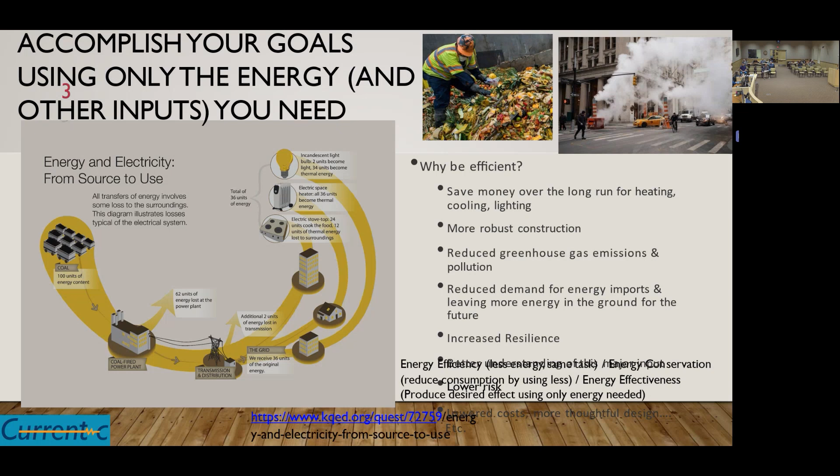For instance, if you reduce the volume of the inside of your house, if you've got an attic in your house and the attic sucks the heat out of your house and your insulation is up at the roof, then you're basically heating the attic. So if you want your heating or cooling system to work more effectively, insulate the ceiling. Put the insulation at the ceiling, let your attic go cold. And then there are other techniques of retrofitting, and some of those will fit a little bit nicer with commercial type buildings, and that would be insulating existing walls and such.

But there are so many new technologies out there, and I'll touch on some of those later as we get further into the presentation. But other things that go hand in hand with getting a permit is making sure that it meets the codes. And if you're not aware of it, as users of the various building codes, we have a library of codes that we have to adhere to. So it's no easy task to keep up to speed with what the codes are doing. But I think pretty much the technology that we have available here in Los Alamos is all approved by the code.

Why don't you go back? We'll let Steve talk to us some more about those principles, Steve, since you had started on those. Well, okay, let's just start at the top.

Utilizing indigenous materials oftentimes can be a cost savings, but if you take the scenario of adobe, when us gringos came to New Mexico, it was easy to get an adobe structure built because it was readily available and labor was cheap. And then when the energy crisis hit us in the 70s, people started looking at the thermal values of building materials. And as soon as that happened and people figured out, a 12-inch adobe wall and a 6-inch frame wall, which is cheaper? And of course, the adobe people left money on the table, so they raised their prices.

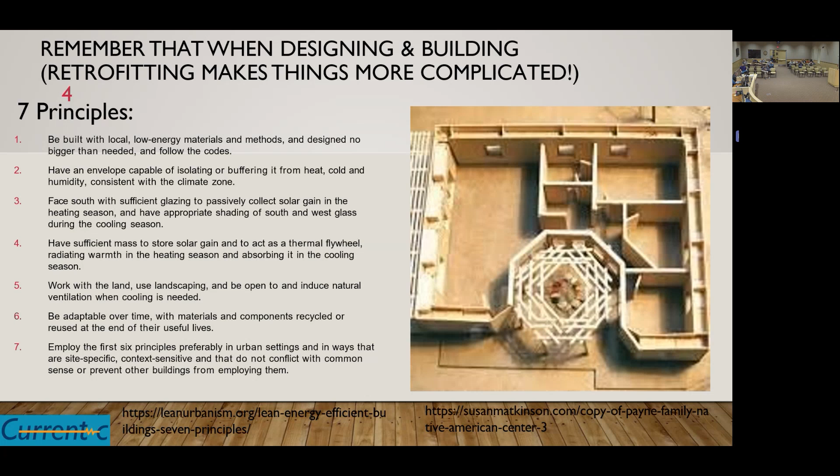So where does energy come from anyway? It's harnessing the power of nature, whether that is electricity or water or the coal that we pull out of the ground, or the oil. My sister, who's a geologist, says she doesn't know why I focus on energy efficiency, because after all, oil and gas and coal are renewable. I'm like, yeah, but not on my time frame.

So, they were put there a very long time ago. And so whatever they are, we try to harness them for our purposes. And sometimes Mother Nature doesn't really like being harnessed. So that's where we get to climate change. It's obviously something that we're all talking about in various ways. Said sister does not believe in it. I'm sure many other families are split in that way.

But the concept is that as the world changes, as different parts of the world heat up, other parts cool down. That changes wind patterns, ocean patterns, rainfall patterns. And that is what's going to change our world for the foreseeable future. And we just haven't been there. We don't know what it's looking like. That also is changing design parameters.

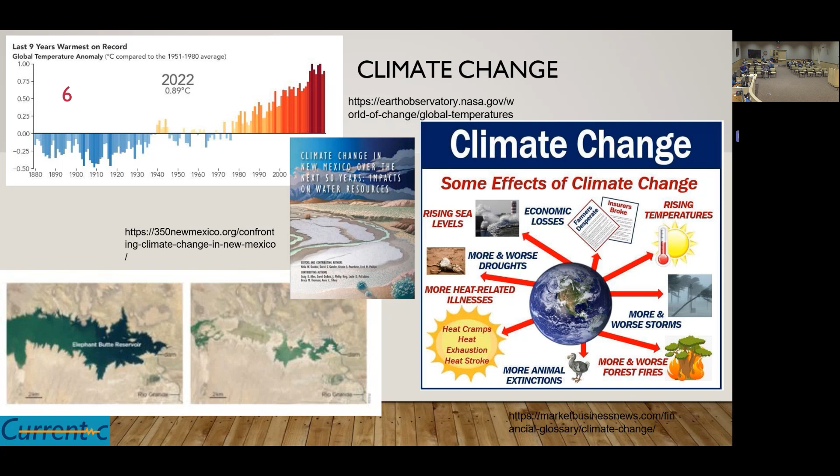And you can see a lot of the climate change effects there. And last time I went past Elephant Butte, I struggled to find it. So I haven't been by for the last couple of months.

Go ahead. So buildings are both part of the problem and part of the solution. About 40% of energy use is used in buildings. And that means that if we work on reducing that 40% in various ways, we can be part of the solution. There are a couple of methodologies where people try to look at how we can solve this problem.

Project Drawdown, which is the left side, they talk about how we can draw down the carbon and other particulates in the atmosphere so that we don't have as much global warming. There are various types of wedges that say, hey, we've got the technologies out there. If we just work on them methodically, we can do that as well. Did you want to talk about?

Yeah. Regarding carbon capture, we have here in little Los Alamos a company called Spiritus Technologies, and they are doing carbon capture, and they're extracting it from the air, and they're condensing it into a solid, and it will be buried in played out oil wells in Wyoming. This little company

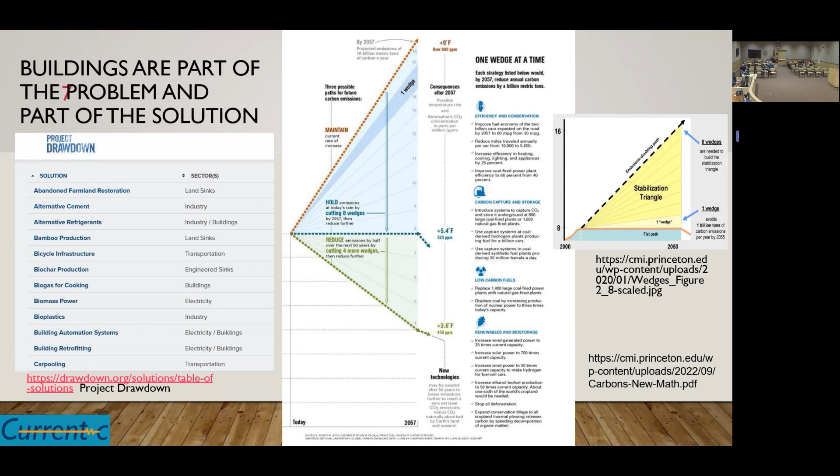Thank you. Yeah, there's a lot of innovation going on in this. As people are realizing the scale of the problem, there's a lot going on. I'm sure there's a lot going on up here. So another word that we talk about a lot is sustainability. And it's not my favorite word because it's overused, but I haven't figured out a better one.

The definition that I have is that it's an ability to maintain or support a process continuously over time, whatever that process is. So it shouldn't negatively affect the environment, the neighbors, the people in the building. And you want to minimize both what goes into the building or the process and the ongoing costs. So in a building, how do you build it, and what do you spend to operate and maintain it? So it goes beyond energy.

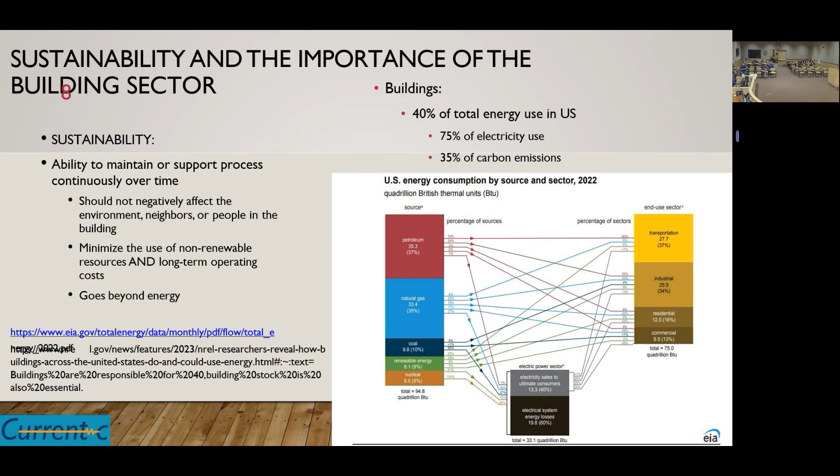Do you want to? Let's go to the next one.

Okay, this is my favorite diagram. It's called a Sankey diagram, and this one's produced by the Department of Energy. On the far left side, you can see all the sources of energy, and then what they're used for in the middle, and then what they're intended to do in the pink.

So if you look at the types of fuel and then where they're used, which is a little hard to see, one thing to notice is that large gray block is what's wasted. So if you collect all the things that actually do work together, they're in that small black piece on the bottom, but the large gray on the top is wasted at all points along the way.

Household energy, we don't have the waste part in there, but you can see that if you're spending, say, $1,900 a year in utility costs, the largest amount is heating and cooling. And then you can see where the others come in. So that's one of the reasons that Steve's been talking a lot about insulation and landscaping and so on. A lot of that affects the heating and cooling.

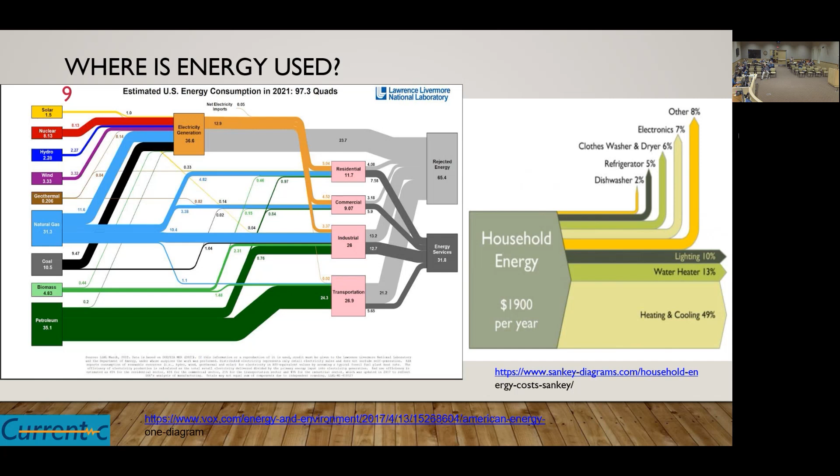Again, this is hard to see. It's a little far away, and I think this is going to be recorded, so should you want to look at it later, you'll be able to do that.

But the idea here is if you have a car and it dies and you need to go out and get another one, we're familiar with looking at the trade-off between the cost of your car and the miles per gallon. So often you'll pay more to buy a car that is more fuel efficient than one that is less fuel efficient because you balance the first cost versus the operating cost.

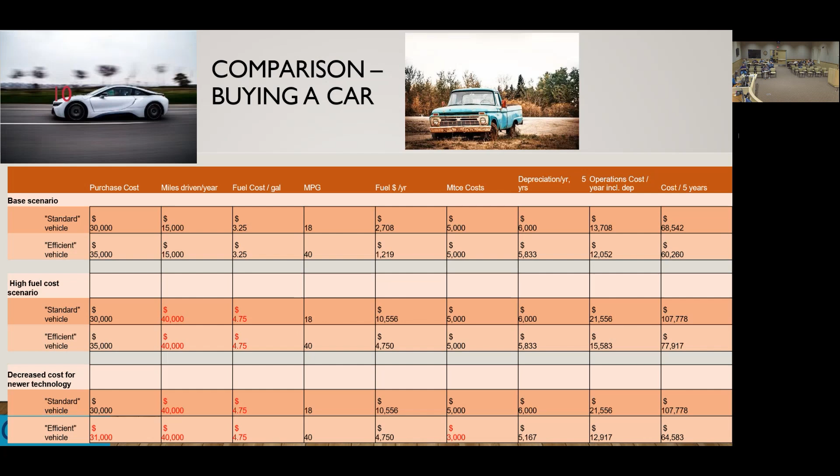Why don't you keep it, because the next slide. Interesting. High performance buildings.

Back when we found the sun again, the ancients knew all about it, but it took until the 70s until we figured out it's pretty important to start thinking about. And so coming down the pike, initially the effort in solar energy was to collect as much of it as you could. And as technology advanced, things changed a little bit, and overpowering the house with passive solar had its problems too.

You can overdo it. And so then people started trying to figure out, how do you temper things? How do you make it so it's comfortable and not blazing hot for the middle of the day and colder than hell at night? And so they started refining things like air infiltration, how much air seeps around the cracks of your windows and doors, and where does the air come from in the house?

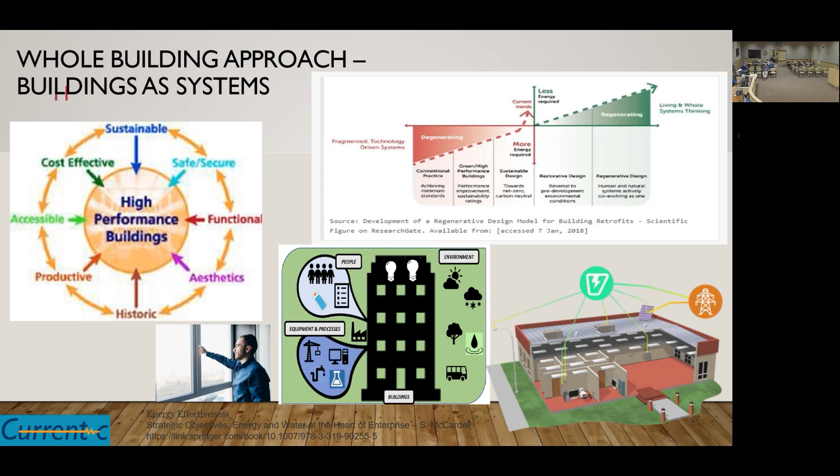Thanks. Okay, now we're on to energy codes, which is the exciting topic for this evening. And, you know, they are important. Number one, they're enforceable law, so they're important for that reason. Number two, they're moving the bar forward. So they're a way of incentivizing or rewarding or whatever they are, punishing those who don't move forward.

But they are a set of requirements for constructing a building legally. There are minimum consistent levels. So everybody's got to do at least this. You're welcome to do a whole lot more. And there are some people who do a whole lot more, but everybody's got to do at least this thing. And they address all aspects of the building. This is what Steve's been talking about, the building envelope, the mechanical, service water, heating, lighting, and electric power. And those are different parts of the code.

They also, going beyond that, improve a building's resilience and the ability to shelter in place as that is built into the code, so that becomes something that's more important. They are developed by the ICC, which is an independent body. They develop these codes, and then that's a model code, which is potentially adopted by a jurisdiction, in this case, New Mexico. And then because Los Alamos enforces its own code, Los Alamos has adopted that code as well, but New Mexico made changes during the adoption. And every place around the country has that choice to make. So we're in with a whole bunch of other states who have adopted this 2021 code.

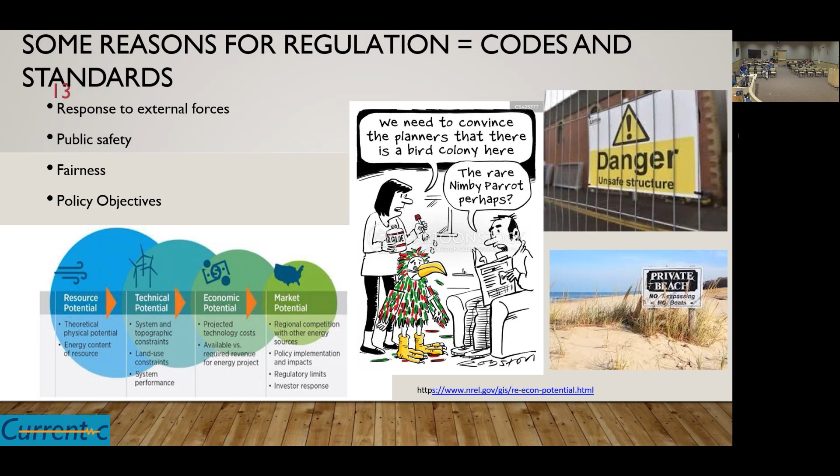And so that water can be captured by the photovoltaic array, and it can be siphoned off and put into a storage system. So these energy farms not only can produce electricity via the sun and the wind, but they can capture water to water plants on the farm. And so, you know, in the future, I think we're going to see agriculture and energy production merging more and more. Thank you.

Now, just because we're talking here about energy codes, just remember there are a whole bunch of other codes, some of which are referenced in the energy code. But please feel bad for your building officials because they need to know all of these and more in great gory detail. And then they have to make sure that all of us comply with them.

You know, the green construction code, the water conservation code, green plumbing, mechanical code, air quality, Americans with disabilities, groundwater, zoning laws, and they all interrelate and they all interact. Some states are more stringent, some are less so, but they're all an attempt to make sure that the buildings we live in are safe and resilient and don't fall down around our heads.

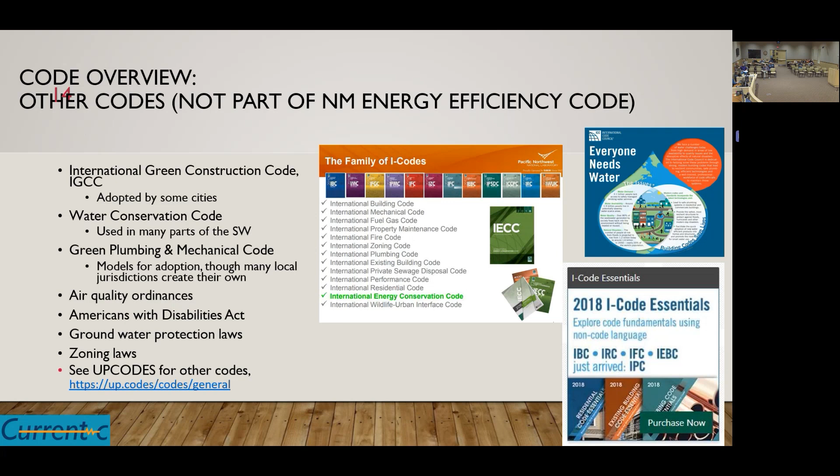So over the years, the size, the height, and the span increased because better engineering and materials allowed that. But as we were discussing the other day when we were planning this, a lot of those buildings were probably engineered by trial and error. So, you know, the Romans, the Greeks, everybody built these amazing buildings. These were probably not their first effort. A few of them probably fell along the way. So they didn't have building codes, but they did have somebody saying, no, no, no, you don't want to do it that way.

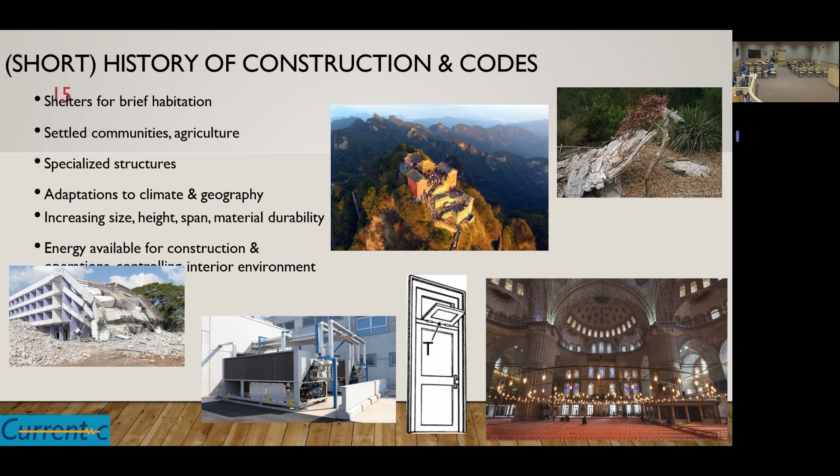And the code is very specific about what you're allowed to do and not do in those types of buildings. And that's an example of cause and effect. There are thousands of examples, but normally the changes in the codes are written for a good reason. Thank you.

Well, just in case nobody can read this, there is another way to do the codes. This is the Code of Hammurabi from 1754 BC. And it contained 282 laws on contracts, wages, inheritance, construction. And number 229 simply says, if a builder build a house for someone and does not construct it properly, and the house which he built fall in and kill its owner, then that builder shall be put to death.

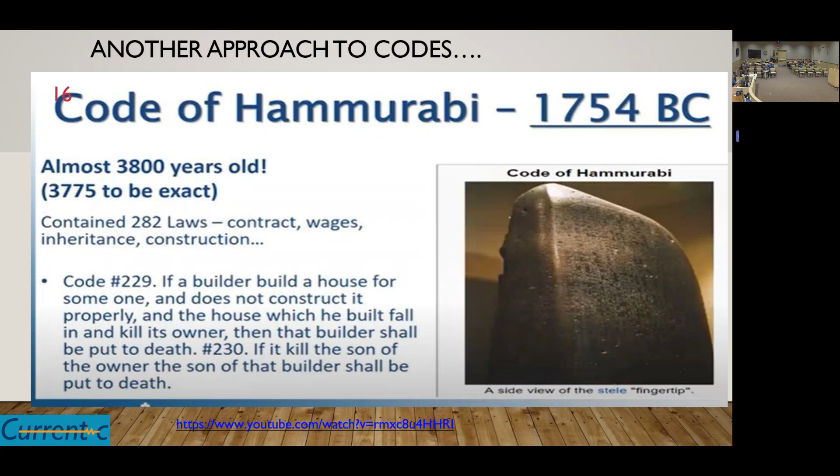Number 230, if it kill the son of the owner, the son of the builder shall be put to death. So, there's an easier way to do that than all the codes that we have, but it's kind of frowned on these days. Yeah, Bob. Exactly.

And in addition to that, the impact of energy codes goes beyond energy. So from 2010 to 2040, it is estimated that energy codes will save something like 138 billion. That there will be 900 million metric tons avoided CO2, and energy reduction. And so there are a lot of statistics in terms of what it is saving.

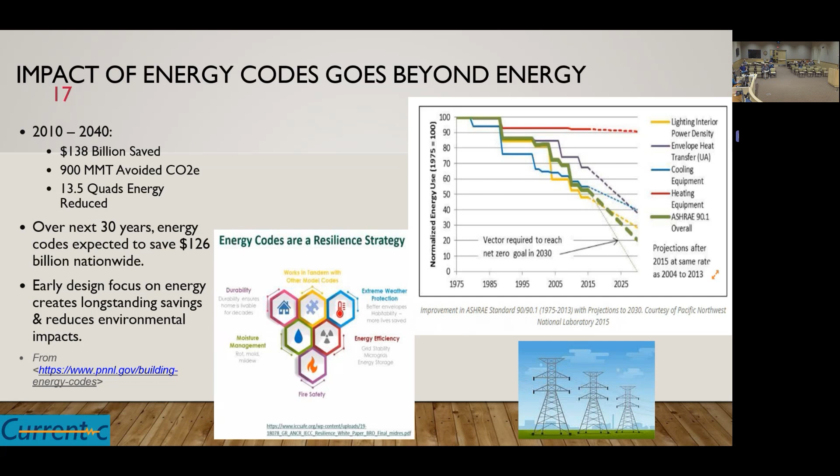And then the early design, this is getting back to what Steve was saying about landscaping and siting. If you start early, then the savings can continue into the future. You can see the graphs that are over on the right. It still looks like there's a gap to be met in terms of greenhouse gas emissions. There's some studies just coming out showing that may not be accurate, that with all the investments that have been made over the past couple of years in the bipartisan infrastructure law and in new technologies, that gap may have lessened significantly. So we're making progress. Fast. We need to make progress fast. Yes.

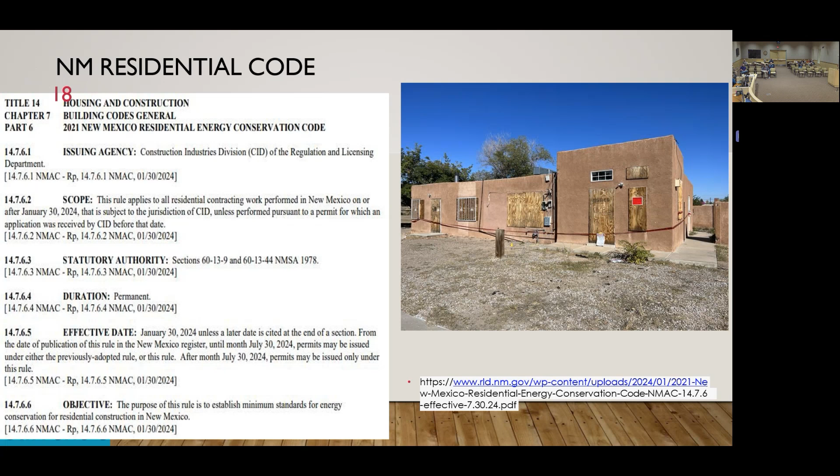Okay, so on to the New Mexico Residential Code. You can find that online, and there's some resources at the end of this talk, and some of them relate to where you can find these codes. It is issued by the Construction Industries Division, CID. And so they're the ones who issue the code as amended for New Mexico. Go ahead and change out.

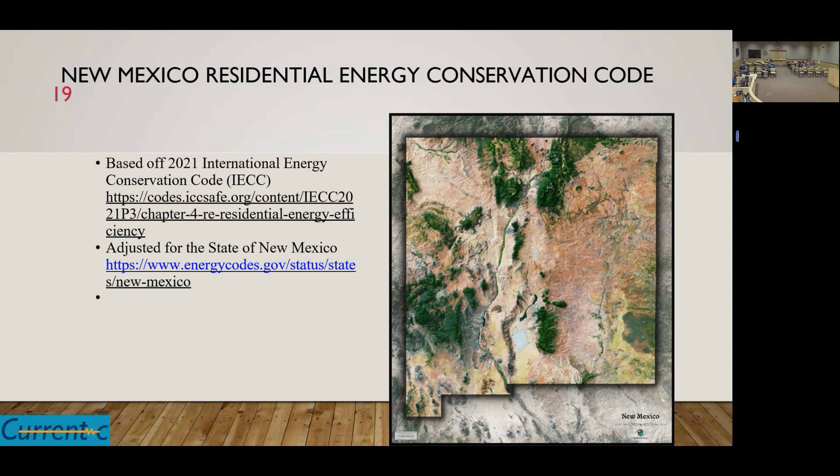One of the changes that was made for New Mexico is that most states do not have as many climate zones as we have. And so the climate zones are by town. And if you look in our code, you have to look up where you live and you'll see what climate zone you are in. That is not in the rest of the code, but we're just different. So that's one of the major adjustments. There are some others as well. Thank you. Ooh, this is hard to read too.

So here are some of the general model code changes. The model code for 2021 is a 9% improvement. They also had additional efficiency packages, so you could go beyond the code. That part was dropped in New Mexico. Insulation value requirements were increased. And then there were changes for cavity floors, basements, sunrooms, heated garages. Some of those were also changed in New Mexico. Air leakage requirements, connection boxes, duct leakage, mechanical ventilation, and lighting efficiency.

And New Mexico lowered that burden a little bit from the model, changed the space definitions, specified which code programs are recognized, adjusted U factors, fenestration requirements, and so on and so forth. And another change that's interesting that New Mexico did, everything else was kind of reducing from the model code, but we added in an appendix, which was the EV charging stations. So that's one that we are really focused on here. Steve, do you want to comment?

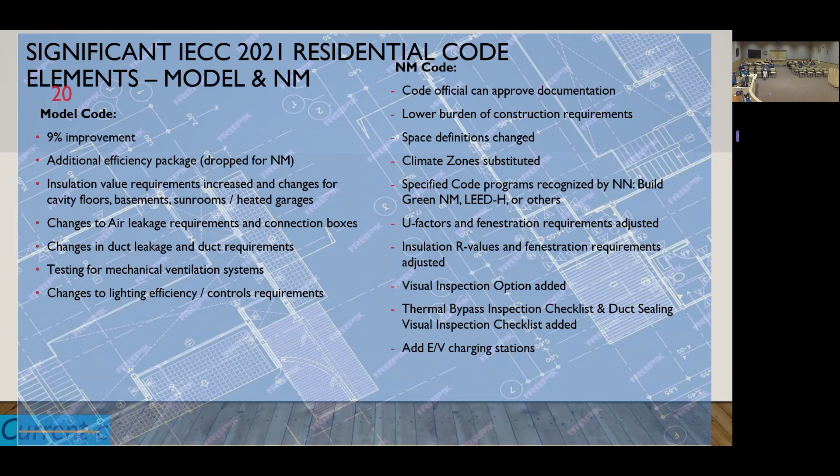You have more on this one? You've got the next slide. Okay.

Okay, well, yeah, there's more than one way of doing things here, and none of them are super simple, but they are very effective at reaching your goal. There is a worksheet that you can go through and fill out, and that gives you a pretty accurate description.

On the other hand, there's some things that I typically do, and I work closely with Mike, who's a plan checker for the county, and one of the things that I like to do is look at the entire system like a wall. And you know, the code's going to tell you you need R20 insulation in the wall. No, it doesn't mean that. It doesn't mean that the insulation has to be R20, but the wall system itself has to be R20.

And so if you look at the physics of what the wall is constructed of and how the air interacts with the wall, there are certain things that you can add to either your U value or your R value. The inside air film that exists on the surface of the wall doesn't move quite as quickly as the air in the rest of the building. And so it provides a little bit of insulation, 0.2 or something like that on the outside, and it's like 0.5 or 0.6 on the inside.

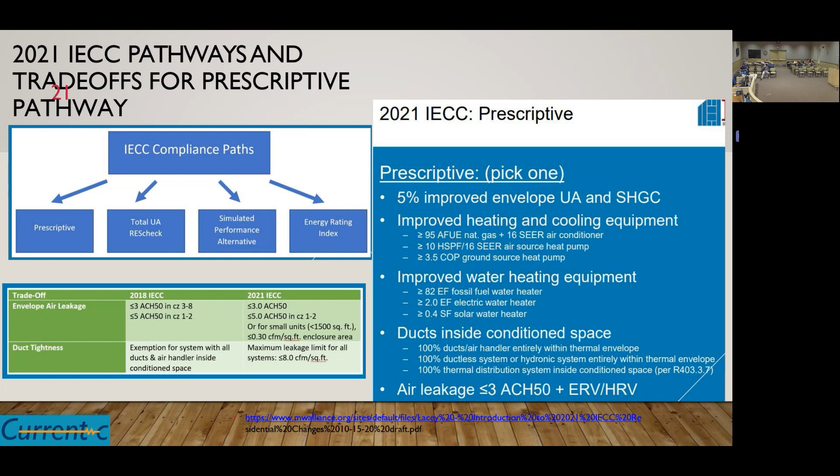Okay, so now you guys all know why you want to talk to an architect. Just a quick comment on the energy code ecosystem. People here are on the left-hand side for the most part, the design team, the project team / applicant. That's the owner, the architectural team, engineering team, the modeler, commissioning agent, whoever is involved in that whole thing. And then on the other side, there's the program administrator or regulatory authority, the code official. And again, you guys are incredibly lucky, and the building inspector.

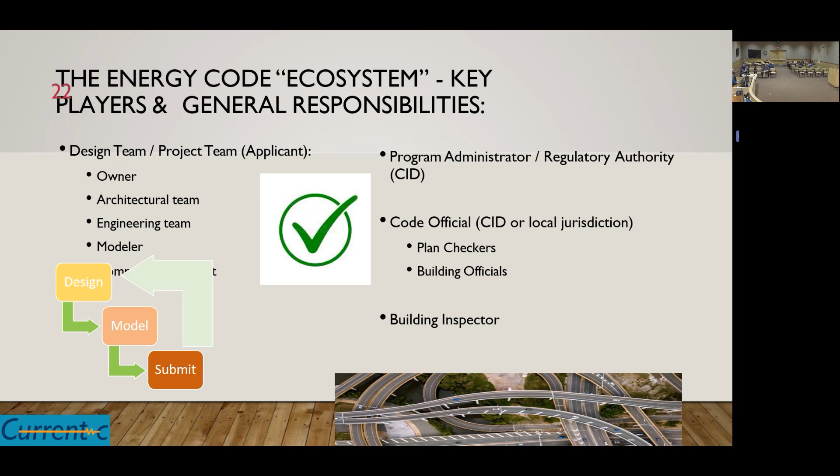So the goal is not to be in opposition. The goal is to work together to get the buildings that everybody wants built in a safe way. So that's really the whole point of this, so that everybody understands a little bit more about what needs to be done to do that and work together. I have it on good authority, one of them sitting right here, that if anybody has any questions, please come in, call, whatever. I don't think Michael actually sleeps, but he does answer the phone. So if you have any questions, talk to him.

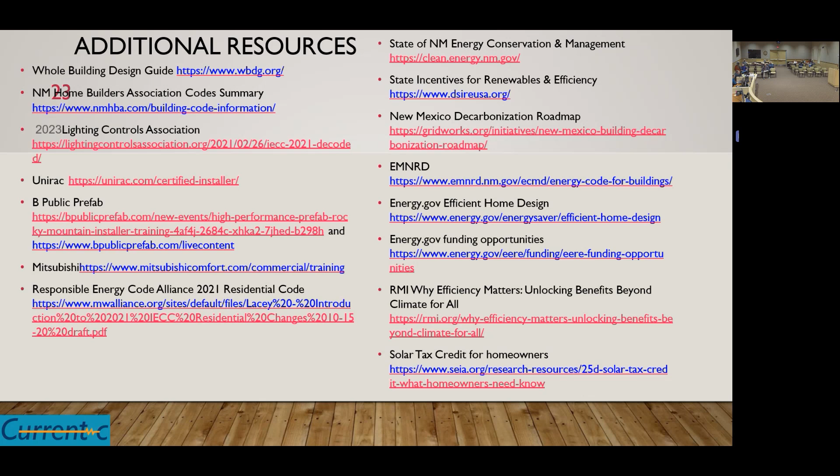Thanks. Then this last one is just some resources related to codes and some rebates and so on and so forth. So this is solar tax credit, energy efficiency, financing, et cetera, as well as some general resources that relate to some of the other things we talked about. And that's it. Oh, except there's the last word. It may not be the last word, but there is some good news.

As an architect, I have to get continuing ed every year, and the booklet that I received this year had a couple of things that were real interesting. There's a movement to try to bring more outside environment into the heated, conditioned indoor environment. But the thing that excited me the most was that Germany right now is developing a hydrogen gas production plant in Europe. And they are eventually looking at something like 300 megawatts coming out of it.

They're making the hydrogen, they're going to distribute the hydrogen in existing gas lines throughout Europe. And this is really, really good news, especially given what's going on in Ukraine and with Russia and the natural gas pipelines and so on. This is really good news. And it's also good news for all of us that have not yet bought a Tesla, because the internal combustion engine that you're all real familiar with is going to probably run on hydrogen one day.